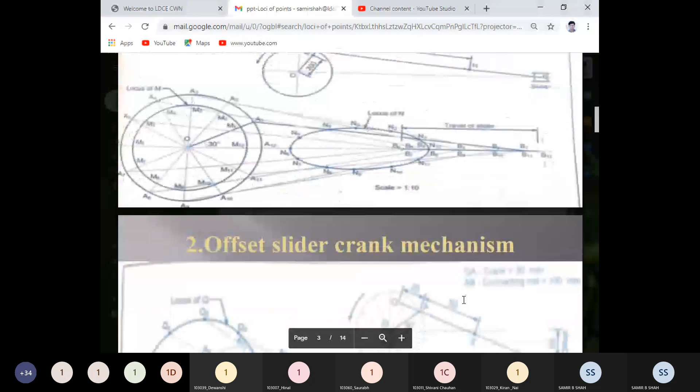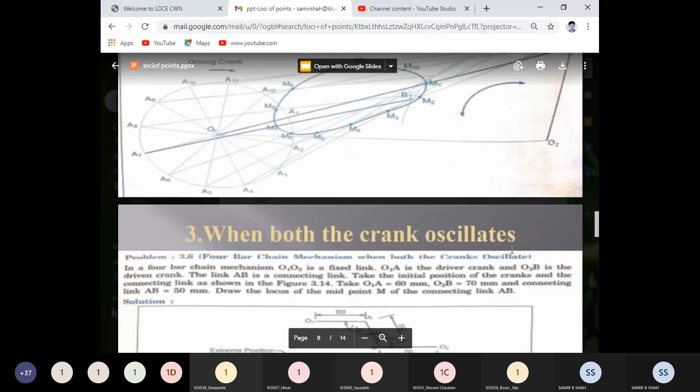Up to the previous lecture, we were discussing loci of points, where we proceeded with the simple slider crank mechanism problem, the four-bar chain mechanism problem, and we proceeded to the special case. In the previous week, I showed you one case from the special cases where a pendulum is there, and many students could solve this example in a very proper way.

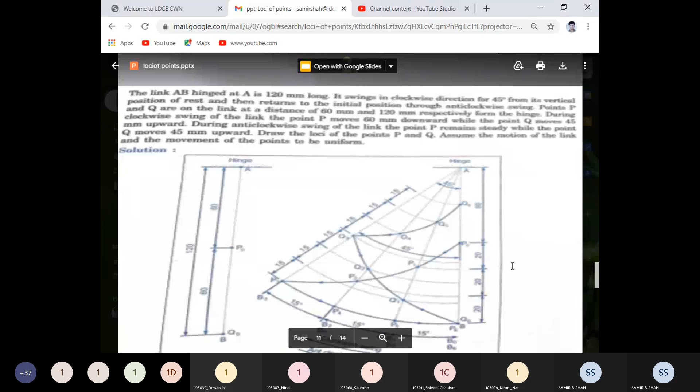So now the new method of special case that I will proceed with. Please read the data very carefully, so it's very easy for you to understand and to draw the diagram in a proper way. The link AB, please write down the data. The link AB of 90 mm length is hinged at its center. One link is given to you whose length is 90 mm and it is hinged at its center. It rotates about its center in clockwise direction for 270 degrees.

During the rotation of the link, the point P, very important, the point P moves along the length of the link from the end capital A to the end capital B. Draw the locus of the point P. Assume the rotation of the link and the movement of the point to be uniform. Show different 9 positions of the link AB.

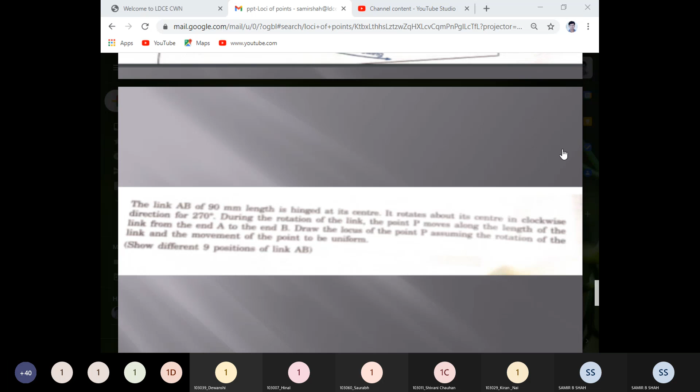Now, from the data, draw the line AB, 90 mm, mention A, mention B. It rotates in the clockwise direction, so mention it with the proper arrow. Then its center is considered as a hinge. So we put the hinge point and consider the center as O. If 90 mm is the total length, then the center is at 45 mm.

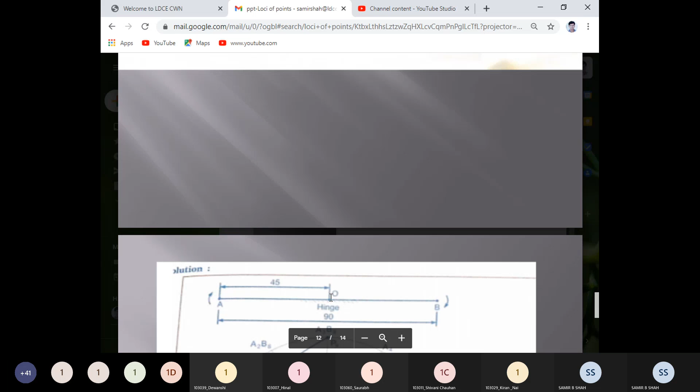Now, take the projection where O is the center and OA is the radius and draw one circle. O is the center, radius equal to A0O. The circle will show the path of the ends of link AB. As the link rotates in clockwise direction for 270 degrees, show the different 9 positions of the link by drawing the lines A1B1, A2B2, A3B3, A4B4, A5B5, A6B6, A7B7, A8B8 and A9B9. These complete 270 degrees. Each division is 30 degrees.

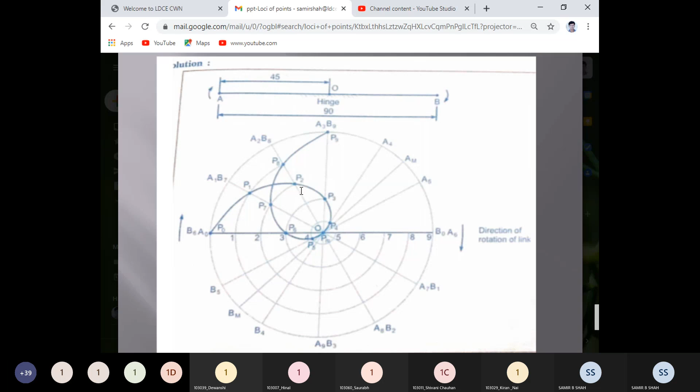Join all P0, P1, P2 up to P9 in clockwise direction. Mark P9 at B9 to show the final position. Line A9B9 will show the final position of the link after rotating about its center O in the clockwise direction for 270 degrees. Draw the smooth curve passing through the different P points. The curve will be the locus of point P.